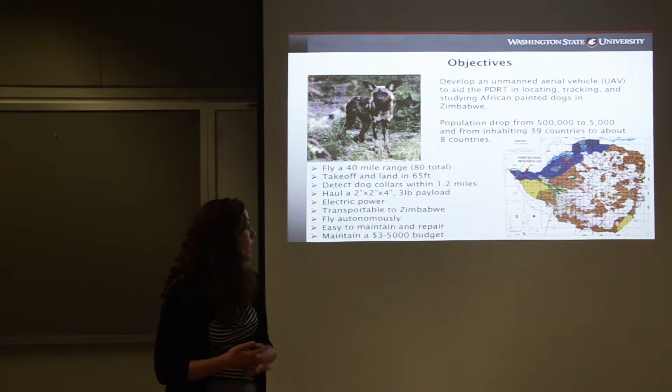And then also easy to maintain, repair, reproduce, so that if anything does go wrong, it can be fixed. And then also maintain a $3,000 to $5,000 budget, as this is a non-for-profit.

So this project has actually been worked on for two previous semesters. The top left, you can see the plane that we were presented with at the beginning of the semester. Unfortunately, just due to some flaws, we ended up scrapping that plane. The center of gravity was a little off. The gas power introduced some difficulties.

It was also difficult to assemble and break down, so transportation issues, and then also just putting everything back together again up in Zimbabwe. And then also it had unreliable landing gear, which was not favorable for use in not optimized conditions in Zimbabwe.

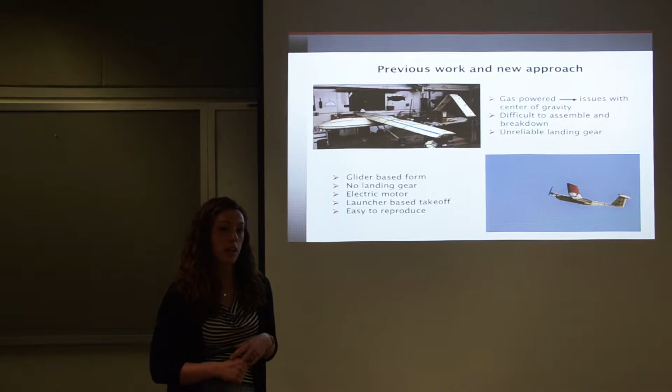So this semester we did a progressive approach, and we went with a glider-based system with no landing gear and electric motor, have it be fairly sturdy, but on the same side, have it also easy to repair. So it's easy to make new wings, easy to make a new tail. If anything does break, it can be fixed.

So taking these new criteria, we wanted to make a simple plane. We wanted to make it as small as possible because the one we were given when we came into the semester was way too large. There's a bunch of empty space in there. It increased drag. So we wanted to make it as small as possible, as simple as possible, and as easily fixed as possible.

So our first prototype was Mark 1 here. It's on the table. Taking this, we just wanted to do a proof of concept. So we did a glider test on it. Then we moved up to Mark 2, which was the first powered flight, tweaking a little bit each time.

However, for our final model, which is the gray one on the table here, we decided to do a female mold, which is different than the other ones, so we laid up on the inside to get a nicer surface finish. We used a 2-part mold for the top and the bottom, just due to our limitations in the mill. We laid up 3 layers of fiberglass in there, birch plywood bulkheads, and then vacuum bagged that. We then popped it out, sanded it, and put a layer of paint on it to make it look nice.

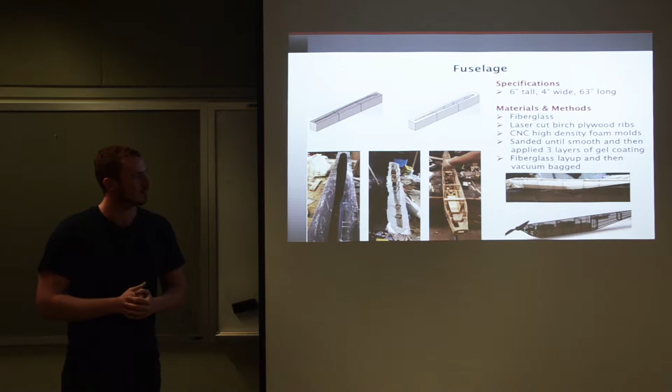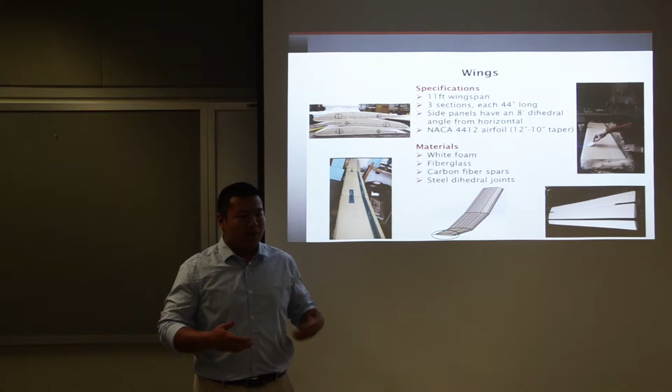So the objective of the wing design is to make the wing as simple as possible, easy to manufacture, easy to maintain, and easily replaceable. We would also want the wing to be able to pop on and pop off easily, so that means no electrical wirings running through the wings and no control surfaces such as ailerons.

We've come a long way in designing wings, from Mark 1's wing, which has a basic rectangular wing shape and a 9 feet wingspan, to our current final design, which has an 11 feet wingspan.

And we decided to make the shape slightly tapered from a 12-inch root chord to a 10-inch tip chord. We decided to split the wing into 3 equal sections, which allows us to have an 8-degree dihedral. We also decided to choose a NACA 4412 airfoil for its high coefficient of lift to coefficient of drag ratio, which allows the plane to have a high rate of climb.

To manufacture the plane, we decided to use a white low-density foam and light fiberglass to reduce the weight of the wing itself. We also use carbon fiber spars for their structural integrity, and bent steel tubes to attach the wings together.

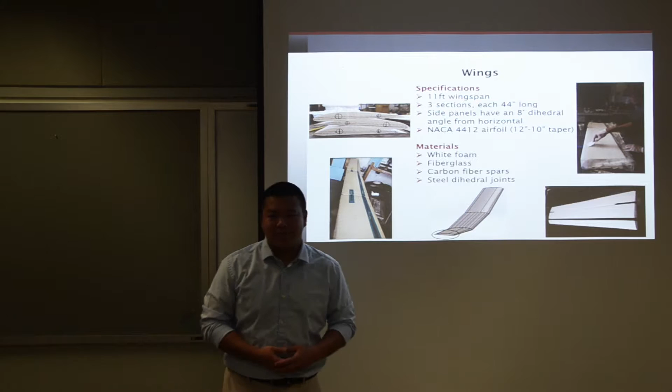The tail, we went with a T-tail configuration, as you can see on the prototype right there. Went with that because it reduces the effectiveness of the turbulent prop vortices coming off the front by getting it up and away from that turbulent section of air.

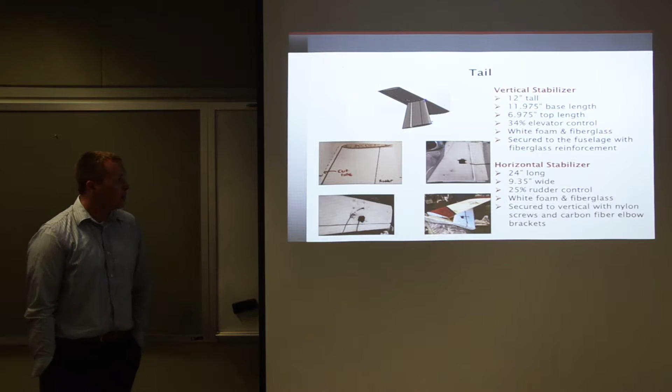Also gets the horizontal stabilizer further away from the ground during the belly landing to somewhat try and avoid any sort of collision there. And it increases the effectiveness of the rudder, which is extremely important because we don't have aileron control. Therefore, all turning is accomplished with the rudder. And going with that, 34% of that vertical surface is the rudder, which is quite a bit more than standard, just so we can have control authority. Same type of manufacturing with the fiberglass over white foam as the wing.

All right. With the fuselage, tail, and body all figured out, we then began trying to find the components that we would need to figure out how we would get this required distance parameter that we established at the beginning. We began by selecting our battery pack, which we selected the largest battery pack that we could get so that we could reach this distance goal. Once we selected the battery pack, we then went on and picked a propeller with a large diameter that could also fold because of the no landing gear.

We then went and picked a motor that would achieve the required thrust to lift this plane, and then finally an ESC with a rating that is higher than the maximum output rating of the motor. We verified our calculations using eCalc, and our calculations ended up being verified with our test flights.

These are the results of some of our test flights. We reached a flight time of roughly 1 hour and 40 minutes, a distance of 88 miles, a cruise speed of 58, and a thrust to weight ratio of 0.43. And a thrust ratio of 0.2 is enough to actually lift up this plane.

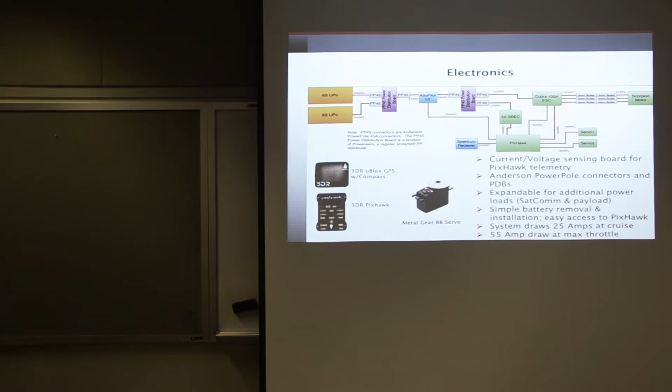So for the power system behind the plane, we are going for a really simplistic design such that if something broke or a part needed to be replaced, anyone in Zimbabwe could do it without a problem. They didn't need to be electrical engineers. So keeping that in mind, we tried to keep the wiring as simple as possible.

Basically, we just have a standard LiPo battery as our main power source. It goes through a current and voltage sensing board, which helps us monitor the status of those batteries such that the autopilot can perform fail-safes just in case something goes wrong with the batteries. And then also the main current load obviously is our motor, which is drawing most of the power from the LiPos. Just a little bit goes into the Pixhawk and runs the servos as well.

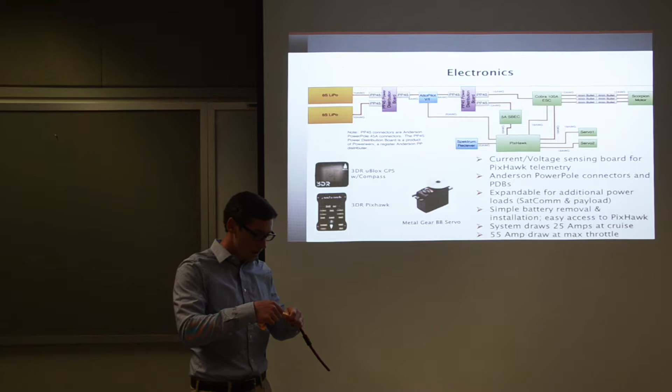On the first prototype, or the MK2, the first powered prototype, we were using these XT90 connectors. They're just a hobby connector. Unfortunately, they turned out to be kind of difficult to work with. They had to be soldered, and then also they didn't have good power distribution boards for them, so you had to solder Y pieces in if you wanted to split the power to different loads.

So then on the third prototype that we did, we switched to the Anderson Powerpole connectors, and these are very nice, easy to connect and easy to make. They don't require any soldering, just a crimp style connector, and they're also color codable.

So to connect the power system, basically all you have to do is connect the yellows to the yellows and the blues to the blues, and then once you have them all connected, you have this system connected correctly. So that just made it really simple for anyone off the street to be able to connect up the power for the plane. Also, they use power distribution boards instead of parallel and Y adapters.

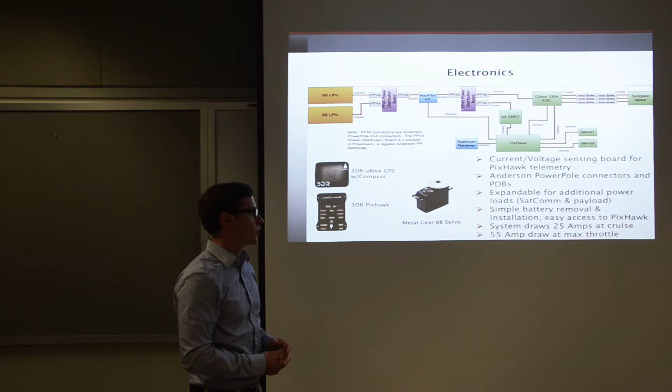This allows easy expansion for additional loads in the future, such as satellite communication modules, so that we can communicate with the plane when it's a very long distance away, and also for the payload that we're expecting, basically the computer system behind the collar interaction. The system usually draws about 25 amps at cruise speed, and 55 amps is the maximum that we've seen at takeoff. This system is able to handle that current draw with no problems whatsoever.

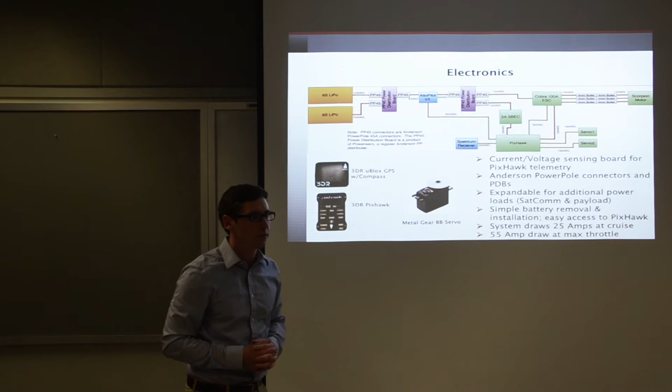And for the autonomous flight itself, we went with an open source solution, community backed, heavy community involvement. So if you ever had problems troubleshooting or needed to know what's going on, you can reach out and someone will be there to answer it for you. So this helped us a lot with tweaking the autopilot to make sure that it worked for Mark II and Mark III of the planes.

We use the Pixhawk, and ArduPilot is the firmware we're using. The different flight modes that ArduPilot provides to us would be manual, auto, RTL, FBW. A lot of these have specific uses. Manual is basically for full RC control over the plane. Auto is when you'd be running a mission, say searching for the painted dogs. Also, hopefully in the future for an auto launch and auto land procedure so that the entire mission can be completely autonomous and we don't need someone who has RC capabilities flying the plane.

One of these modes is auto tune. Auto tune is needed in order to tune the PID controls for the autonomous flight. You can't actually fly in auto with the plane until these are done. Basically, you set it up there, throw it into the mode, and it will tune it so that the sensor information coming from the Pixhawk will be mapped to the control surfaces for the plane. It also allows for a wide variety of control surface configurations for different planes. We have a rudder and elevator only, no surfaces on the wing itself, and it's actually very easy to put that in the software.

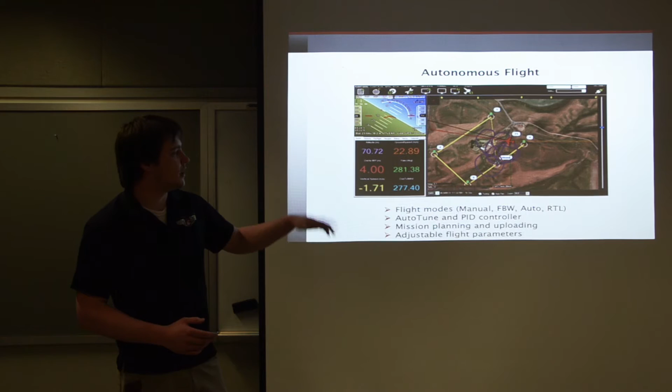coming back and forth between these waypoints, and it will follow those paths. Hopefully when we get the RPi installed, or the control computer on board, we can also redirect mid-flight, go to the dog, get information, and redirect back to our old flight pattern.

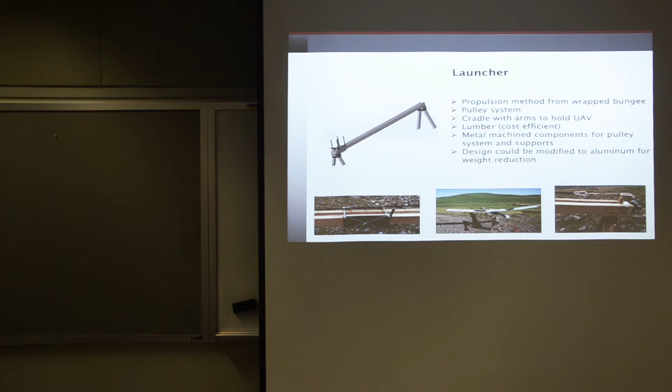So since we had the 65-foot takeoff and landing distance, we decided that a launcher would be the best way to accomplish this, since we may or may not have great takeoff areas. And for the landing gear, we decided it was best just to omit it. After we decided that we wanted a launcher, we needed to choose the propulsion system for that. To start off, we had pneumatic, wrapped bungee, and a spring system. After looking at the pros and cons of the different ones, we decided that the bungee was the way to go, since it proved to be the most cost-effective and easiest to transport. There are fewer specialized pieces.

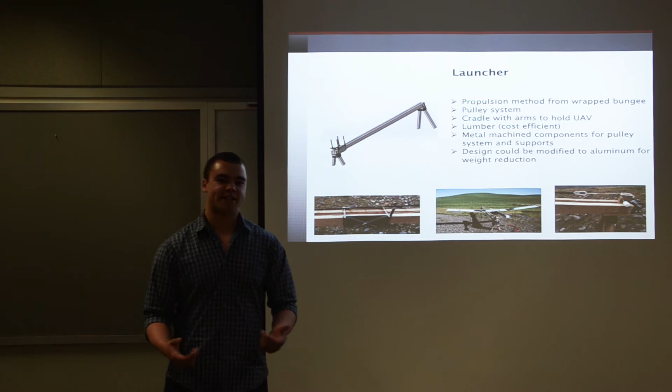We just ended up going with a cradle system to keep the UAV off the launcher so that we could power it up fully before actually launching it, so that we wouldn't have a situation where we launch the UAV and then the UAV would come down because for some reason we didn't have enough power. We also decided to go with lumber for the frame, since it's cheap and easy to get, and since it's box-shaped, it's also really easy to move over to extruded aluminum so that you can reduce weight by a lot at an increased cost.

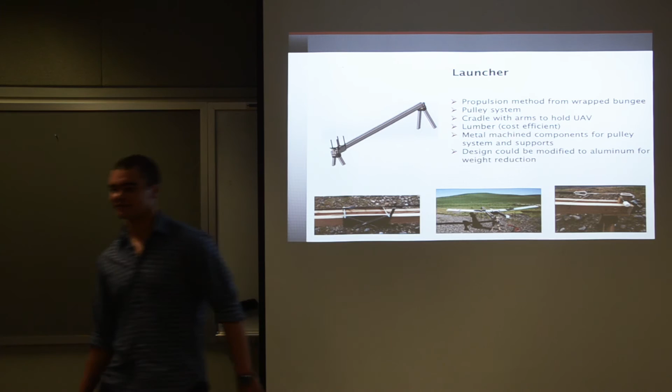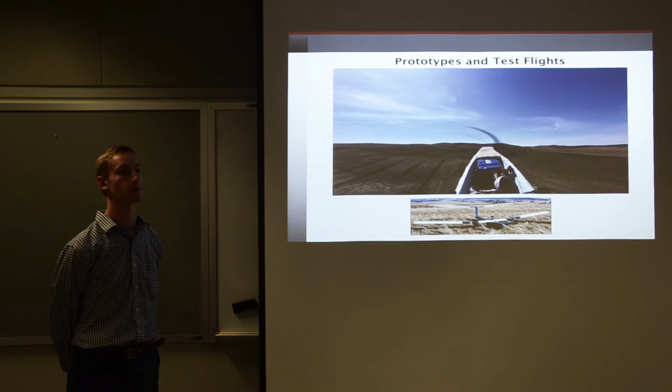So we're going to talk about our prototypes and our test flights. You can go ahead and click play there. So on the bottom you can see this is Mark 1. It was our very first glider prototype. This is Mark 2 flying here in its third flight. So takeoff and landings are all pretty easy with remote control. The rudder and the elevator provide plenty of control for that. So we'll go around and I'll show you some in-flight footage and things of that nature.

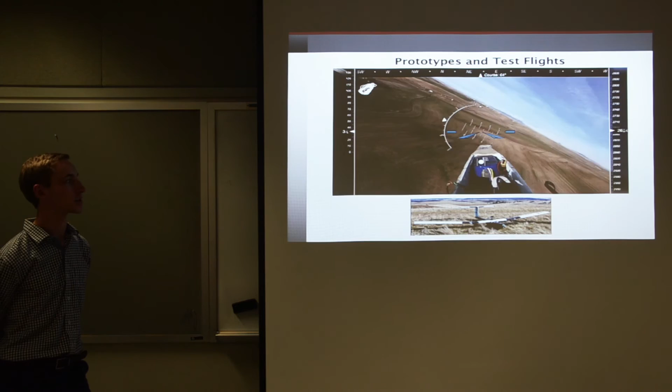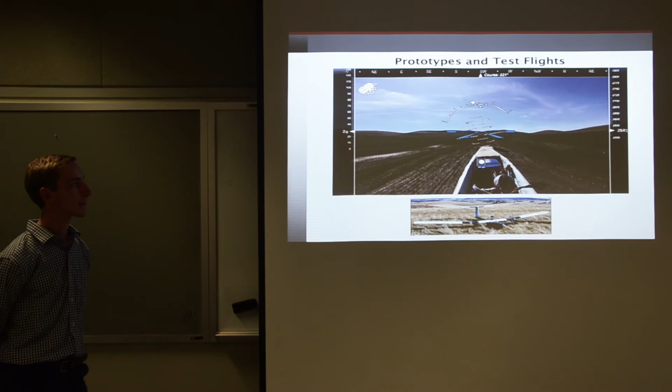So again, as Alex had mentioned, we have a fiberglass fuselage with the foam inside of it, and we were able to fly with our current batteries 23 miles in 19 minutes, which we were very happy with. And we will be flying with Mark III next week for longer distances there. So you can see us coming in for a landing here. Fantastic. And you can see the folding prop, how it's totally out of the way. Go ahead to the next slide there.

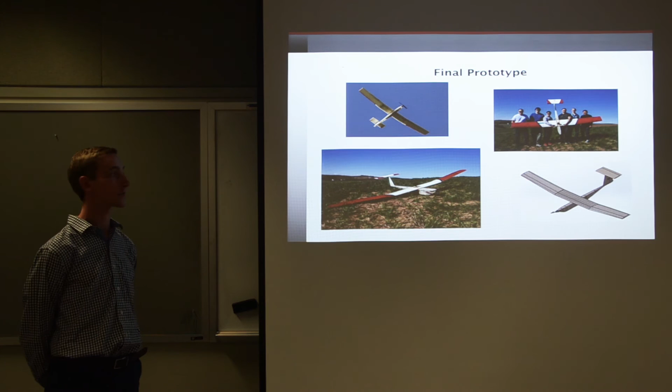So now you can see our final prototype here, painted nice. It has the new fiberglass fuselage, so we dropped all the foam weight. We're using a different foam weight now, so that makes it easier. And fast forward to the video. So again, in this one we have the newer fuselage, the same wing essentially, updated tail, and our larger batteries. So these are our 22,000 milliamp hour batteries that should enable us to fly for the full 1.65 hours, and we'll be testing that next week to ensure that that is correct.

But on our calculations, we should be able to fly 88 miles in 1.65 hours. Again, you can see the nice Pullman field. We're just rolling around here, and then we'll come in for a landing again. So flight characteristics overall were really good. We were really happy with our glider design. Made a lot of progress this semester and we're really excited. Again, you can see the folding prop totally out of the way. We haven't had any issues with all of our 8 flights total on our airplanes. It's been very reliable. A nice grass landing.

So for next steps for us, for this semester, we want to increase the vertical stabilizer volume. So we had a little bit of a wagtail essentially when we went up and flew 2 days ago. So we want to reduce that with a little bit larger vertical tail. We want to have a better securing mechanism for the horizontal stabilizer, and then we want to complete our manufacturing and assembly guides, so that you can go from nothing to a full UAV with an instruction manual and make it very easy to work with.

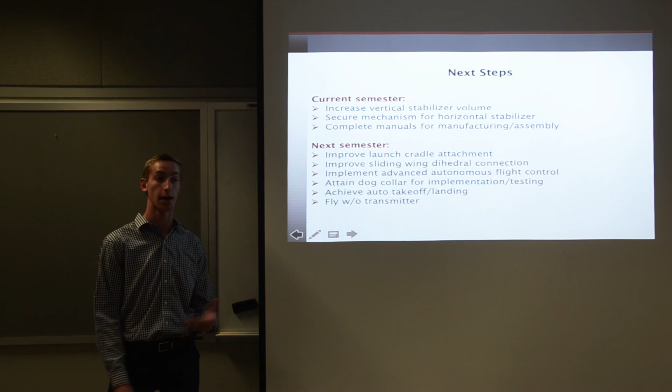So for next semester, we want to improve the launch cradle attachment. We want to have a better sliding wing attachment, so the wings slide on nicely for detachable points there. We want to have an advanced autonomous flight control system, just very easy to work with, and that's what we're working with currently. Attain a dog collar for actual implementation and testing, make sure that system is good to go. Achieve auto takeoff and landing, and then ultimately fly without a transmitter for full autonomous flight.

We'd like to thank the Painted Dog Research Trust with Gregory Rasmussen and Carrie Culp. They've been fantastic in this, helping us and keeping this project going. We'd also like to thank Gene Jones, who is here with us today, and Kevin Kohler for their support in helping us through all of our design matrices and getting this as far as we were, and also Charles Pezeshki for helping us with the 416 class. Thank you.